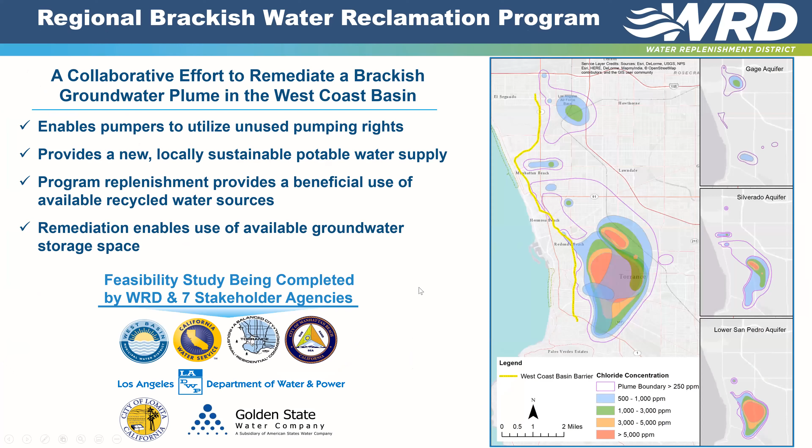We have a series of injection wells, and let me go back real quick to this. We have a series of injection wells that go along the West Coast basin here. And it's this yellow line that I'm pointing to right here. And what we're doing is we inject fresh water into the basin. And actually, all of this is advanced treated recycled water at this point. There is some imported water that gets in just due to hydraulic issues, but the majority of it is advanced treated water. At that point, wells inland of this plume extract groundwater, and that's what's being used by all of our pumpers.

So what we're doing is we're looking at taking this brackish area and removing as much of the salt as possible. And part of our mission not only is to replenish the basins, but it's also to clean up the basins. By doing so, we can have our pumpers utilize their rights. We are adjudicated. So both our basins, the West and Central Basin, are adjudicated. So different pumpers have a certain amount of rights that they can use. And essentially they are allowed to pump up to those rights, and we charge them what we call the replenishment assessment. And we supplement whatever natural water doesn't fill up the basins with these various amounts of recycled water.

What this will do, though, is once we remove that brackish plume, that area will be filled with advanced treated recycled water, which is really a new potable water supply for the region. The remediation allows for more storage space also. And in Southern California, there are some very large plans right now to treat more recycled water. There's an MWD plant in Carson, and also just north of this area at the Hyperion plant for the city of Los Angeles. Their goal is to essentially treat all of that water to advanced treated water standards and then put it into various aquifers. And our aquifer is one of the first that they can put it into.

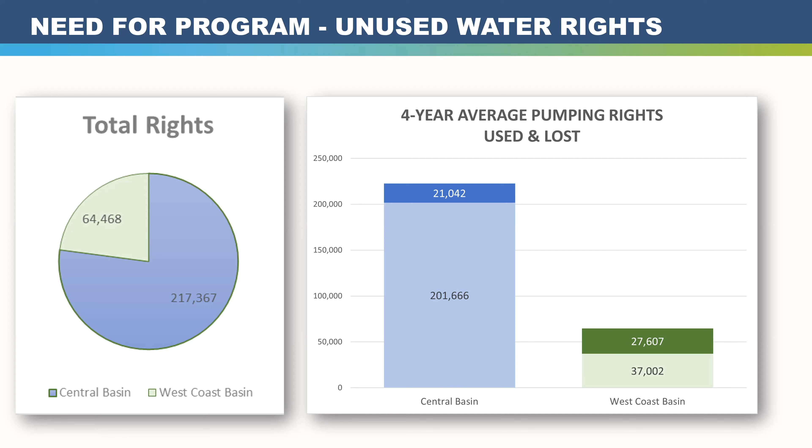When you look at the cost components of taking out water, essentially a pumper will do minimal treatment to the water because it's pretty good quality. But if there's salt in it and you have to do a reverse osmosis process, the cost doesn't make sense compared to imported water. So essentially we're going to be doing that treatment and paying that differential to get that water cleaned up so that the pumping community can use those additional rights. And we'd like to see all the rights being used. And that's our goal.

So to develop this program, it started quite a few years ago, really a program of this size. We have quite a few stakeholders, the local cities and the local private agencies. We started back in 2017 with stakeholder meetings. We got a Prop 1 grant to help out the process, and we've finished up the feasibility study, and now we're on to the next phase, which is looking at doing a piloting.

But the feasibility study gave us a lot of information. We were able to hone down a variety of different size projects. We looked at targeting which aquifer to do first. We looked at the historical pumping rights. We looked at facility siting. One of the key things that we're going to have to do is discharge brine. Any RO plant obviously creates a brine, and in our area that's difficult to deal with.

One of the things that we have been doing quite a bit so far is sending our brines to our wastewater treatment plants. But since that is now the source of water, we really don't want to do that because it's adding to the salt load that has to be treated. So it really doesn't make sense. So we're looking at brine discharge as being one of the key components. And then obviously, what makes sense to connect to the potable systems in the area.

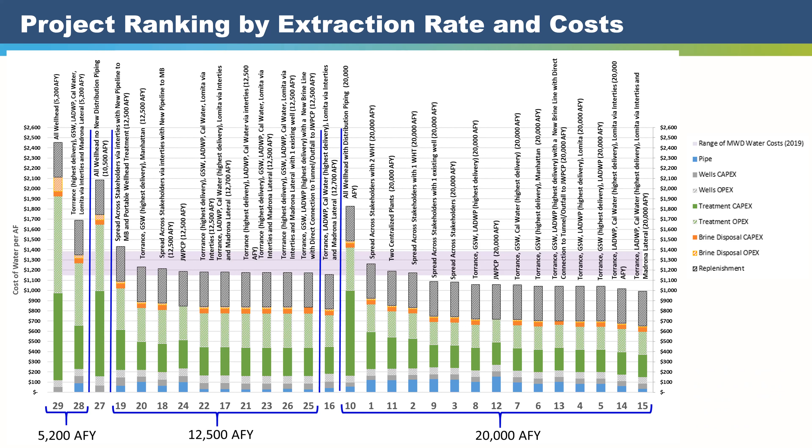So once again, I'm not going to go through all this, but you can see we looked at a variety of different size plants and different locations and configurations to see what would be feasible, trying to hone in on just a few of the projects to get a cost per acre foot that, with our subsidy, would be in the ballpark so that people can purchase water around the imported water cost, which is through the Metropolitan Water District.

So in the analysis on the short list, we looked at our operations and maintenance requirements, the power supply. We looked at permitting, environmental review we'd need, entitlements, project costs, delivery alternatives. We looked at the range of things anybody would do with a project to really see how we would go about it. And here's what we came down to.

The plant is probably going to start out at something in the 10 to 12,000 acre foot range. And a lot of that's due to what the purveyors can use at this time. For instance, City of Los Angeles would like to take up to 10,000 acre feet of water, but they need to do some work on their system. So that will take a few years for them to do. So we're looking at really a range of 10 to 12,000 acre feet up to 20,000 acre feet.

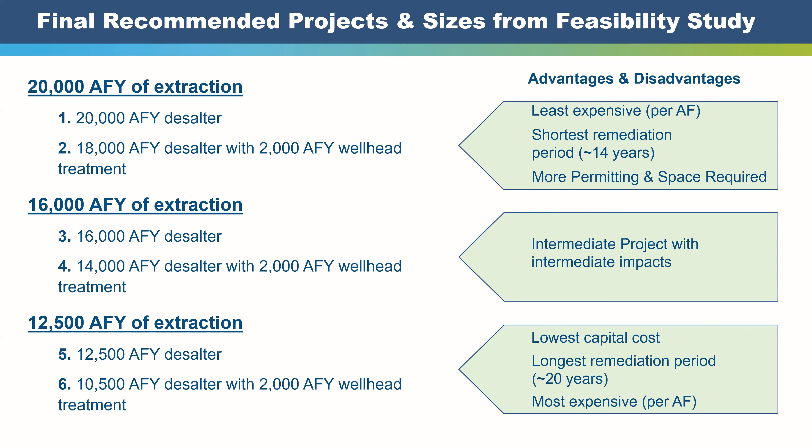And to get to that 20,000 acre foot number, it's kind of interesting because that's going to require the Hyperion treatment plant in the city of Los Angeles to really produce water. But they're thinking that that can produce up to 150,000 acre feet a year. So there would be a large supply of water coming from that plant, which obviously easily could be used for replenishment in our basin. So once again, that's kind of the range.

On capacity, we're looking at up to 11 extraction wells, probably a centralized desalter. We actually have another desalter in the area called the Goldsworthy desalter. We're really thinking now of linking the two in a variety of ways, both with source water and for production purposes. It'll be interesting to see what comes down in the final plan.

But as we look at the basin and we look at that amount of salt that you can pull out of the different areas, it does vary. And so we're going to look at all the different blends we can do based on utilizing both plants. There was that one little piece farther north in Manhattan Beach that might be a separate desalter. It just doesn't make sense to tie it to the centralized one, just from a distance standpoint. Treatment technology will probably be reverse osmosis with disinfection, typical of what we're doing at Goldsworthy right now.

Once again, the plume and where it's located geographically is mostly in the city of Torrance. So we do have a preferred site picked out at this point. Environmentally, there's really not real environmental impacts. In fact, we've been doing this same type of process in the Goldsworthy plant now for 20 years. Basically, we extract water that is too salty and we inject water that's fit for drinking. So it's been a tried and true system here.

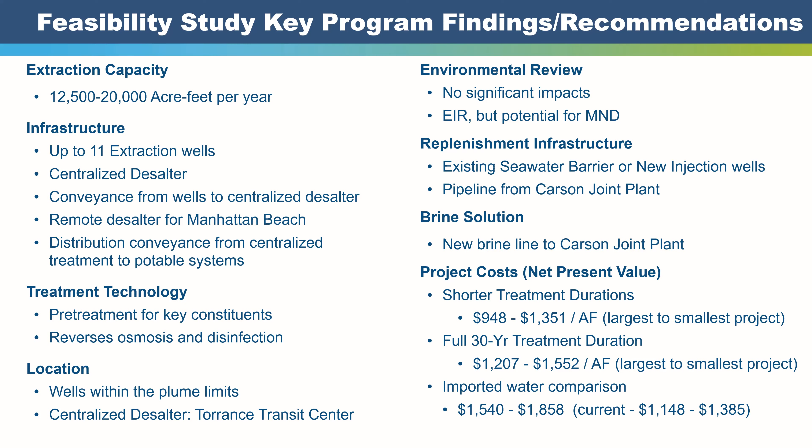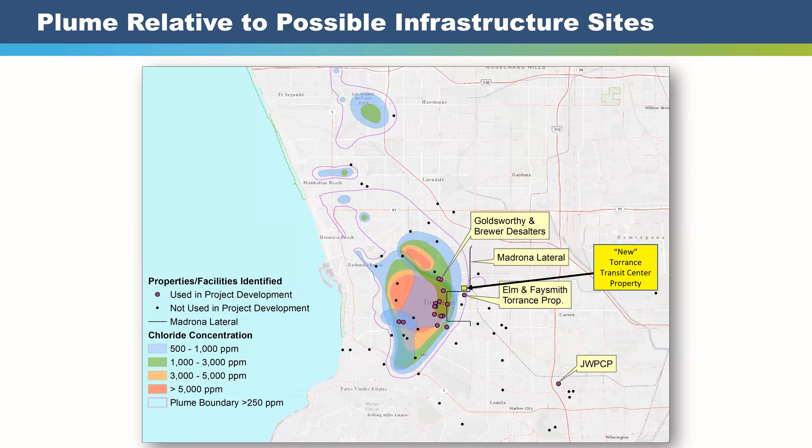So next steps, we got to work on the site itself, develop some project renderings. We got to see how much of a site we really want, and part of it is how expandable we want it to be. Obviously, different footprint for a 10,000 acre foot site compared to a 20,000 acre foot site. So we are going to look at that.

Big look is at the replenishment sources. We're working with our partner agencies, West Basin, LADWP, MWD. We'll buy water from any of those facilities. And we're going to actually probably work with them to expand some of their capacity to provide us more water.

We're going to do a pilot study, drill a few pilot wells in some of the salty areas. Part of it is this area actually has a lot of organics. So really when it comes to your RO technology, you really want to know what your source water is. We probably will have to do some pre-treatment, probably some activated carbon for pre-treatment, and then the reverse osmosis. And once again, we're looking at that brine discharge. And this is an interesting thing because actually with the Goldsworthy, we have an exemption to extract water not using rights.

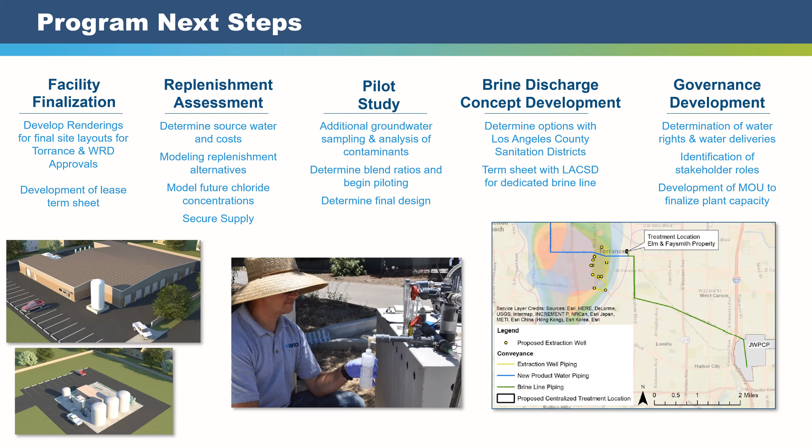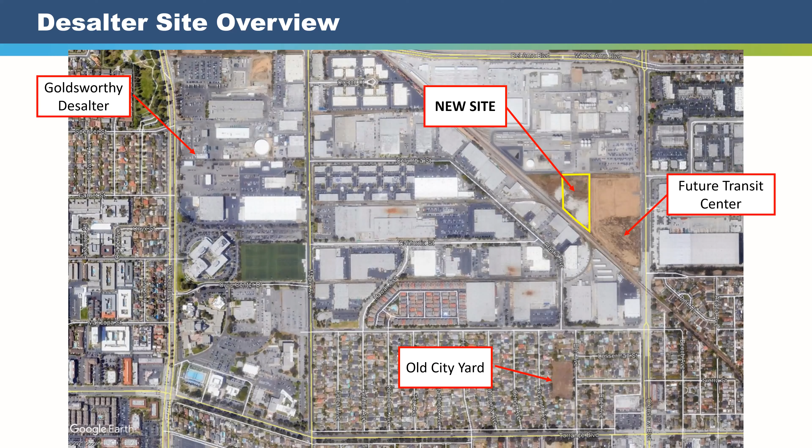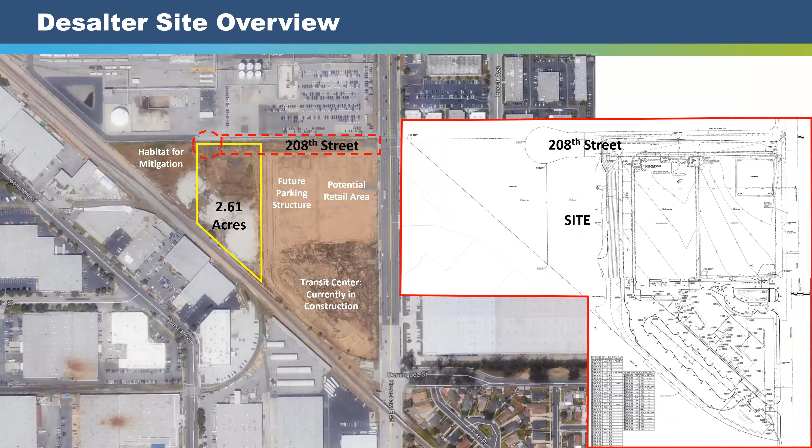A little more close up of the site. This 208 Street doesn't exist yet and is kind of in construction now. Actually, where the dirt is, there's a new transit center going in Torrance, so this would be kind of behind that.

So then I talked about the replenishment aspect, and probably should have had this slide a little earlier. Number one represents Hyperion, and really the city of LA's goal right now is to recycle 100% of their water. They don't want any water going out to the ocean. So that plant can produce up to maybe 150,000 acre feet a year.

That number three next to it is the Edward C. Little plant that's run by West Basin, and they actually get their source water from Hyperion. They've been operating for many years though, and that can be expanded to produce more water.

And then if you look down at number two, that's the joint plant that MWD is looking at. The LA County Sanitation runs a large sewer treatment plant there, and MWD is looking at that for, once again, an advanced water treatment plant to produce a similar size to Hyperion, over 150,000 acre feet of water a year.

So these are the next new sources of water in LA: these advanced water treatment plants, trying to limit the amount of Colorado River and/or imported State Water Project water. These three sources will be a key part of the future of Los Angeles.

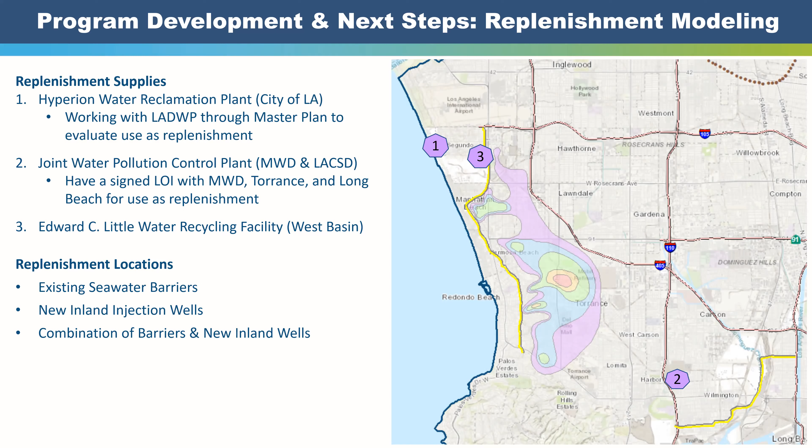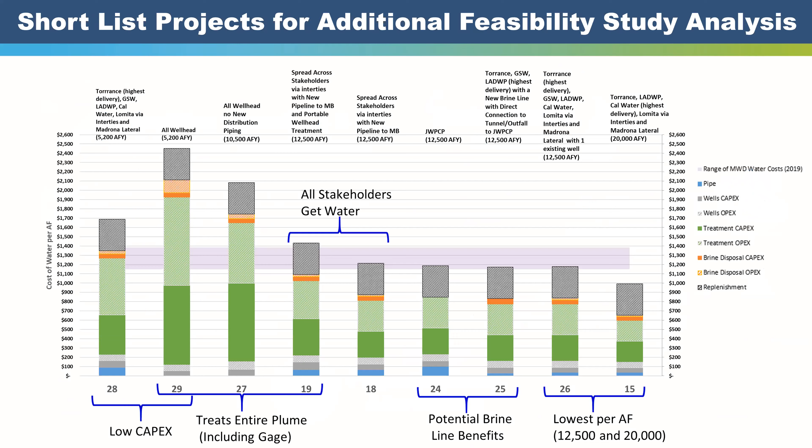The amount, though, that's in there is below the current RLs that are out in California. So while it's a component of it, it's still a very small amount. When you do reverse osmosis treatment, you remove PFOS, so it's not in that water source, but it is up in that Pico Rivera area. We do spread tertiary water also, and there is some PFOS in that. Like I say, the amounts coming out nowadays are below the RL levels that are required.

So that said, we do have a program with our pumpers in that area to provide funding for PFOS remediation. There are several pumpers in that area affected. Not so much, once again, in the West Coast Basin at all, but up in that Pico Rivera area, several of the pumpers are affected. In fact, we just signed our first agreement with Pico Water District to provide funding for treatment.